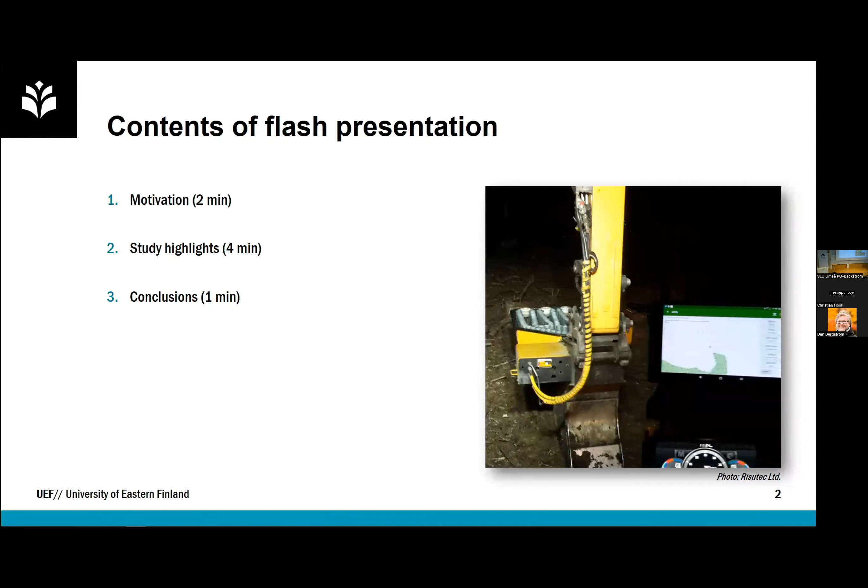And Tiina Laine, in her dissertation, underlined that productivity of mechanized tree planting must be more than 190 seedlings per hour.

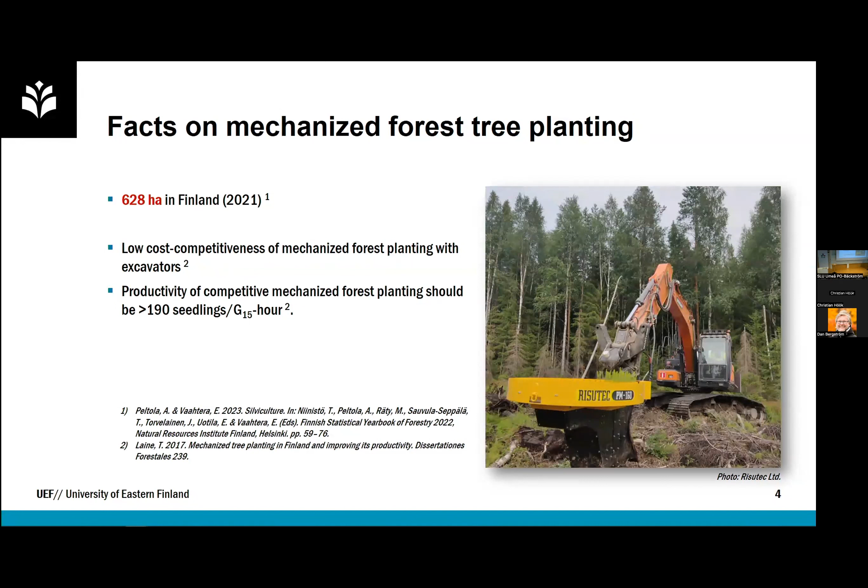And in our study, actually, the results are from Antti Sairanen's bachelor work, and Antti investigated using Risutec ASTA files: What is the production time on the planting site? What is the loading time of each seedling cassette? What is the planting time of each seedling? And finally, what is the operating hour productivity?

Also, Antti clarified what is the effect of soil moisture on time consumption in planting operations. But I will skip that section from my presentation because of lack of time.

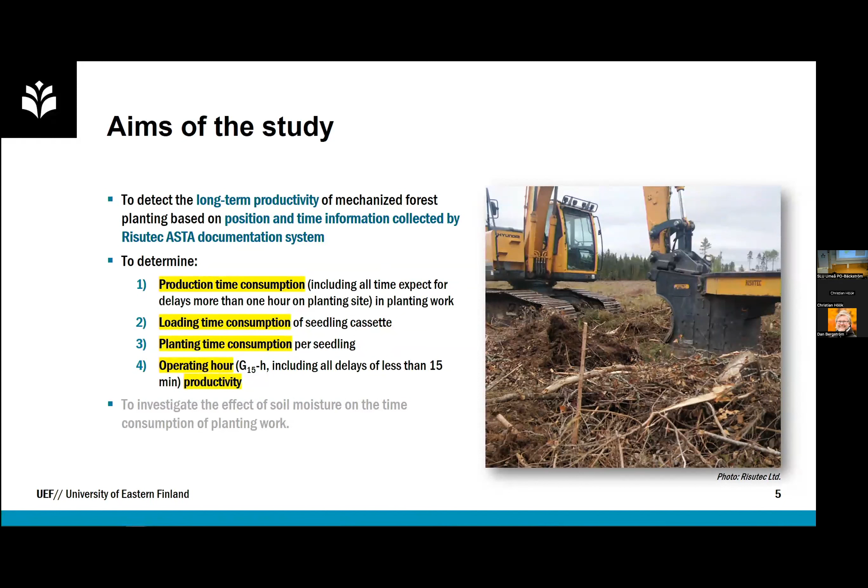Okay, our material: Risutec ASTA gpx files, including position, like Ville mentioned earlier, but they also include a time stamp for each seedling. And we used that data. We had a follow-up study, 9 planting sites owned by UPM-Kymmene during 2020-2021. Here we have the number of seedlings and area, and here we have our machinery.

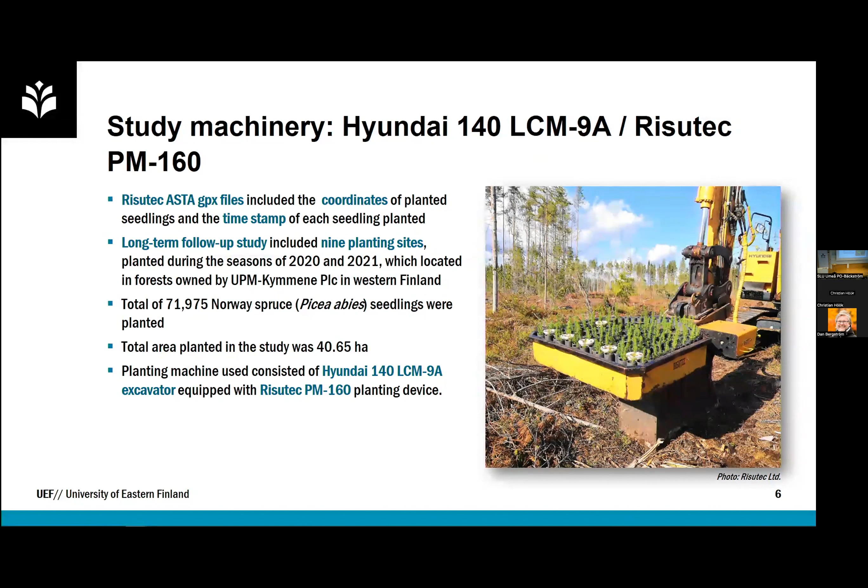Hyundai excavator and Risutec PM-160 planting device. And our material was mainly mineral soils, site class Myrtillus, stoniness only little rocks, mainly harvested logging residues, stumps not harvested, as you can see, and area, total area, total number of planted seedlings, and average density of seedlings, our data.

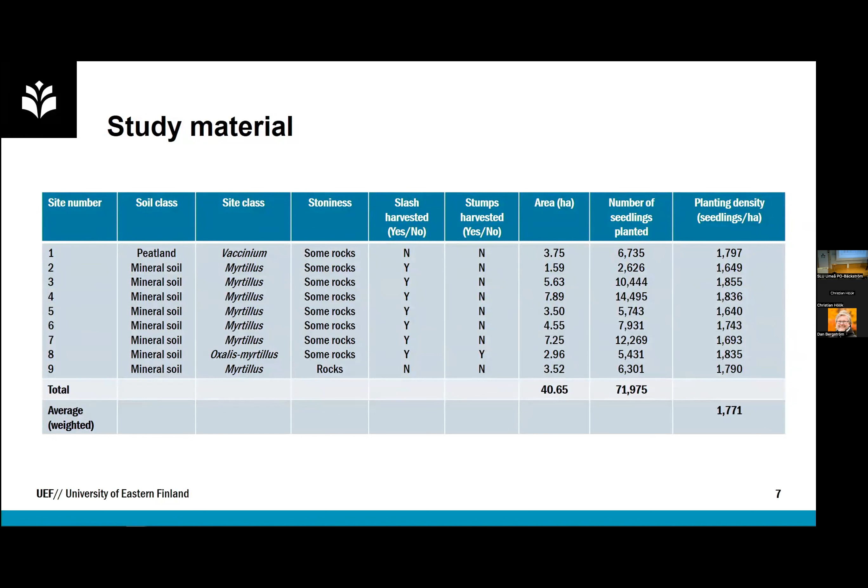And then results: production time consumption was on average around 9 hours per hectare. Actually, here is a more accurate estimation, but like 9 hours.

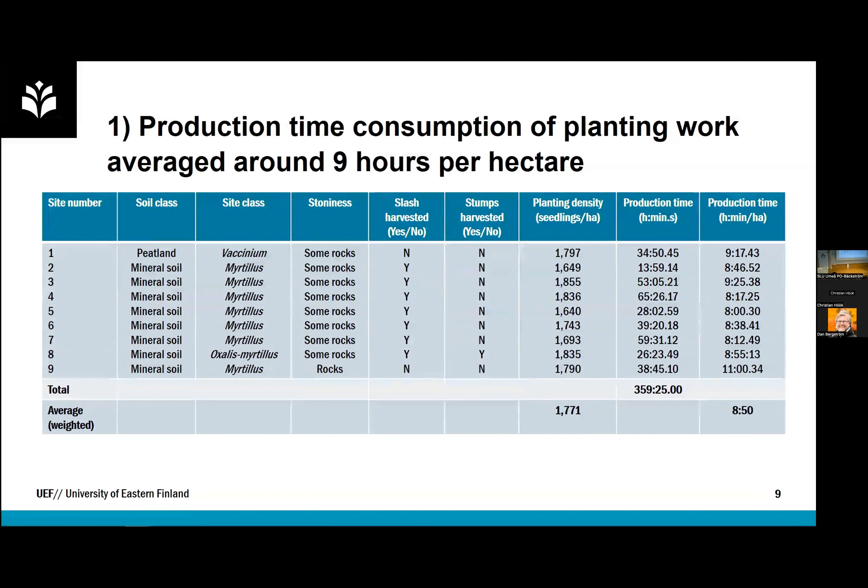Yes, 3 minutes, fine. I have three main highlights for you then.

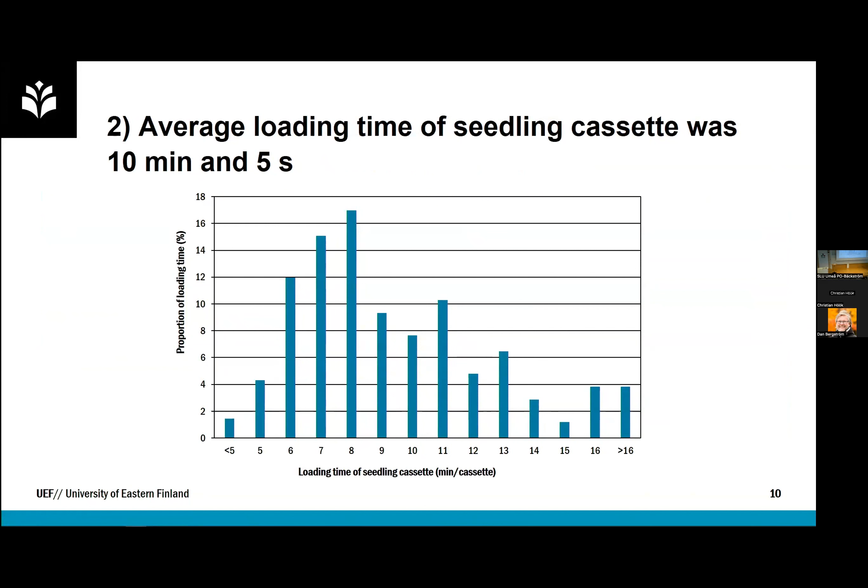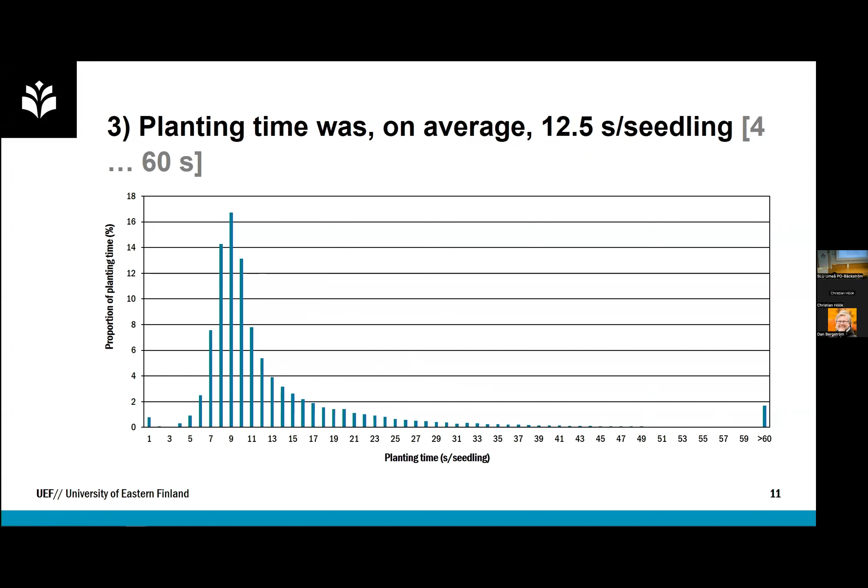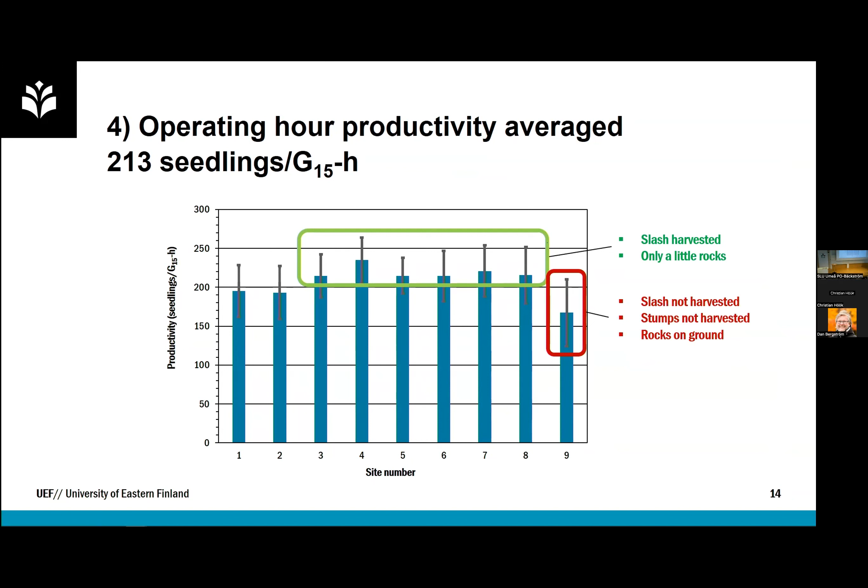And our lowest productivity: no residue harvesting. I guess that Timo and Timo's colleagues have the effect of residue harvesting around 20% roughly. No stump harvesting and quite many rocks on the site.

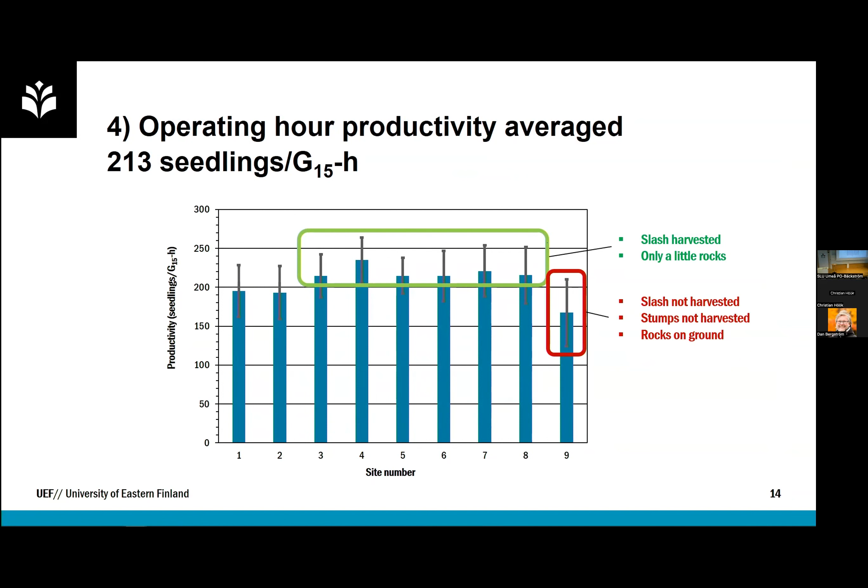And done. My last slide. If I summarize our results, actually the Risutec ASTA product gives huge potential to analyze the work of planting. We used Asta data to analyze productivity, but we can analyze working methods and the improving of working methods of excavator operators.